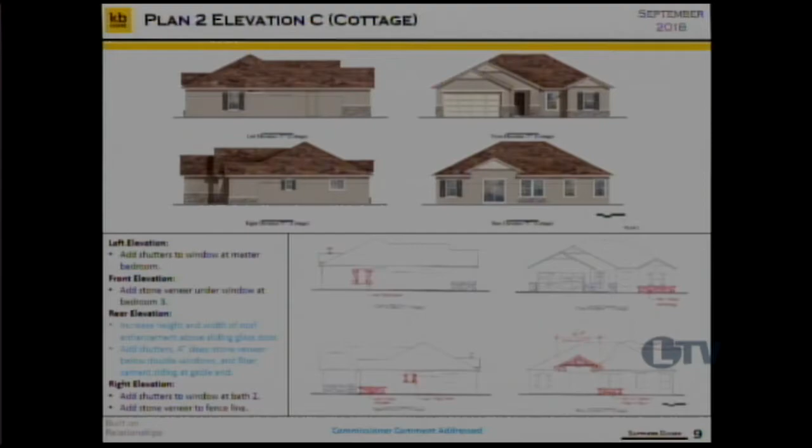Moving on to Plan 3, back to the Spanish. Shutters on both the left and right elevations have been added. On the front, we have again revised that stucco color of the covered porch. That is now matching the stucco highlight from the color board.

Similar to the first Spanish one that we saw, we have changed the color so that above the porch is that darker color versus the front. On the rear elevation, we have also had the roof enhancement above the triple windows - so again, not over the door, this is over the windows. And we've added shutters, the 4-inch stucco base below the window at the master bedroom, and we've also added clay pipes where the roof enhancement is.

Plan 3 for the cottage. Shutters have been added to both left and right elevations. We've added the stone veneer to the front of the front elevation, and we've also extended it to the right elevation to the fence line. At the rear, we have the roof enhancement, the shutters, the stone veneer beneath the windows, and the fiber cement siding at the gable end.

Plan 3 for the farmhouse. Shutters have been added to the left and right elevations. We have brick veneer at the front elevation that's been added, and it's also been wrapped around the right elevation to the fence line. We have added for the rear, shutters to the windows for the master bedroom. We have the roof enhancement and the brick veneer below the triple windows in this case, and the board and batten at the gable end.

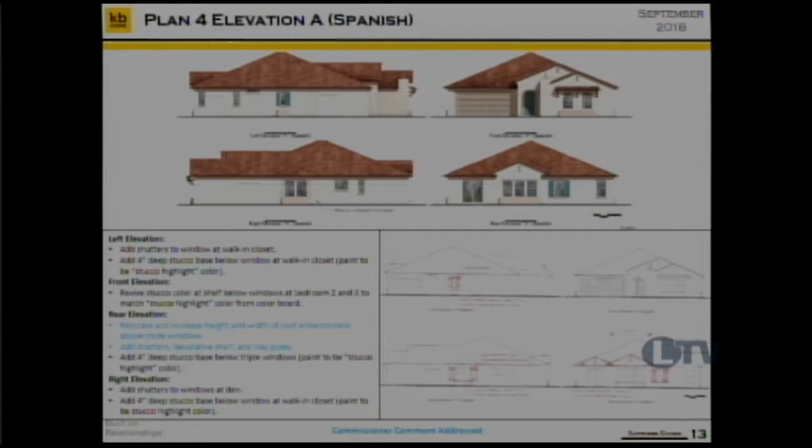Plan 4 for the Craftsman. At the left and right elevation, we have added shutters to the windows. We've added the stone veneer going to the fence line on both the left and right elevations, and we've increased the depth of board and batten material to 12 inches. The front elevation, the stone veneer has also been added below the bedroom and to the walls of both sides of the garage. At the rear, we have the roof enhancement, shutters, stone veneer below the double windows, and the board and batten at the gable end.

Plan 4 for the farmhouse. For the left and right elevations, we have added the outlooker and board and batten material to the gable end. We've also extended the brick veneer to the fence line. Also on the right elevation, we've added shutters to the windows at the den.

For the front elevation, we have the brick veneer that's now below bedroom 2 and at both sides of the garage, and we've replaced the brick at the bedroom to continue with board and batten. Going to the rear elevation, we have the roof enhancement, the brick veneer that's been added below the triple windows, and board and batten at the gable end. We've also added shutters to the window at the master bedroom.

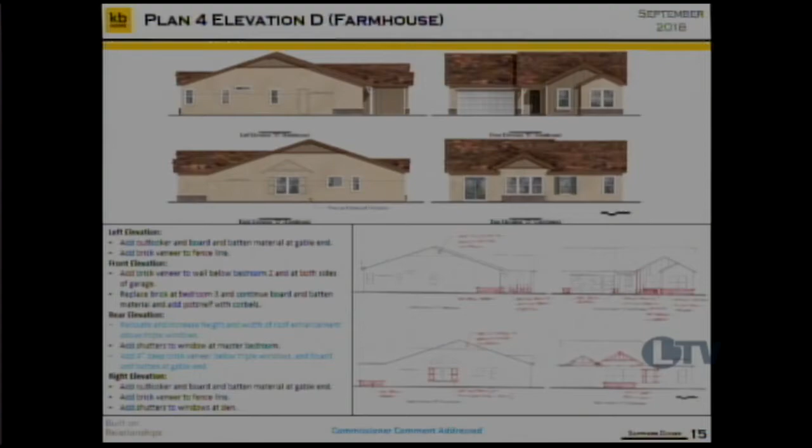Moving on to the final plan, Plan 5. With the Spanish, shutters have been added to the left elevation. The front elevation has that same stucco revision, a different stucco revision from the other Spanish, but there has been a revised stucco color.

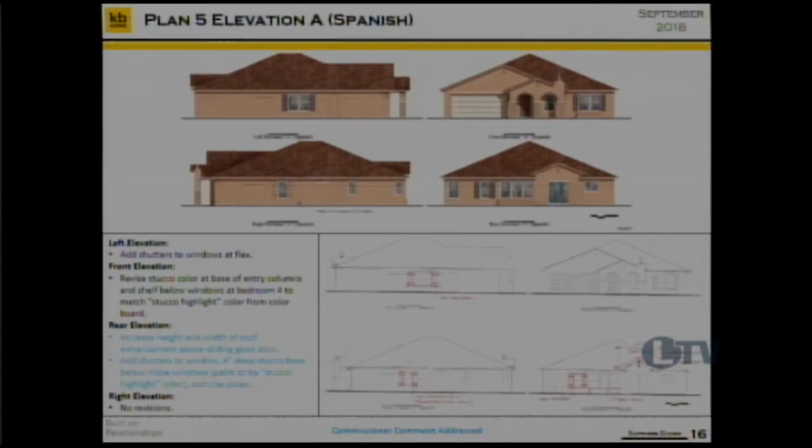These will be at the base of the entry columns and the shelf below the windows at the bedroom, matching the stucco highlight from the color board, or contrast. At the rear elevation, we have the roof enhancement, shutters to the windows, and the 4-inch deep stucco.

Base below the triple windows, and the clay pipes at the gable. Plan 5 for the Craftsman: there has been a roof element added over the left and right elevation, over the windows. One is the bedroom and one is for the flex space.

There's also been a stone veneer extended on the right elevation to the fence line, so it's now wrapped around both left and right elevations. On the front, we've added stone under the windows of the bedrooms, and we revised the porch columns to match plans 1 and 4, which was a comment we saw earlier for the Craftsman.

And at the rear, again we have the Commissioner comments: the roof enhancement, added shutters, the stone veneer below the double windows, and the board and batten at the gable end.

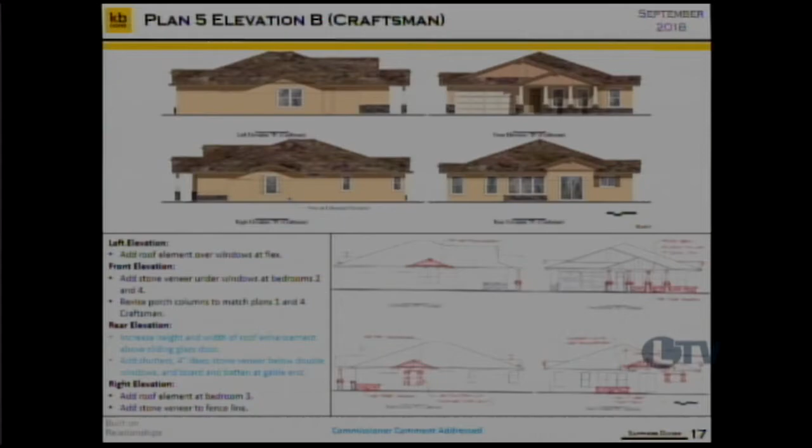And finally we have Plan 5, the cottage. On the left and right elevations we've added that roof element over the windows, and we've also extended the stone veneer to the fence line so both sides now have that extension. The front elevation has added a stone veneer below the bedroom windows.

The rear elevation includes the Commissioner comments about the roof enhancement, the added shutters, the added stone veneer below the windows, and in this case the fiber cement siding at the gable end. So with that, we feel we've taken the Commissioner's comments to heart and addressed them through the plans we've gone through. Thank you for your patience in going through that.

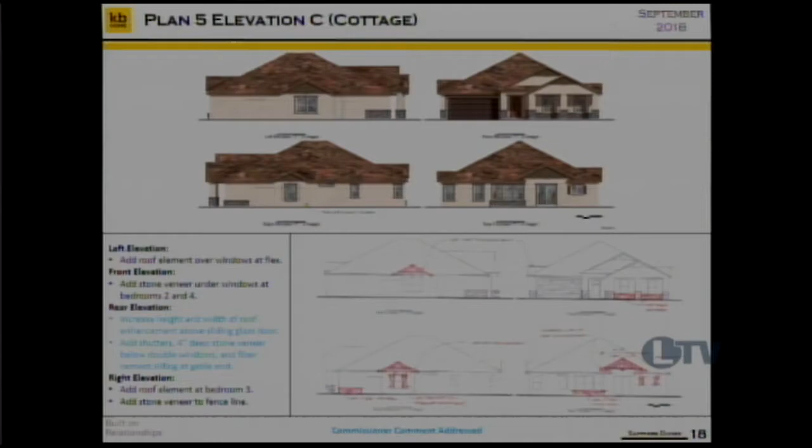Next, I just want to quickly go through again the overall elevation plans that we have. Looking at Spanish, that is offered on all 5 of our plans, and we do offer a variety of finishes when it comes to color and other features, so it's not just repeating the same Spanish elements over and over. They are unique across all 5 plans.

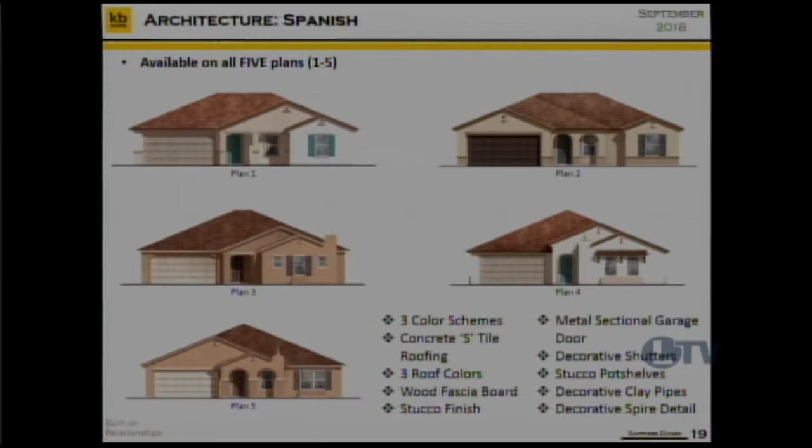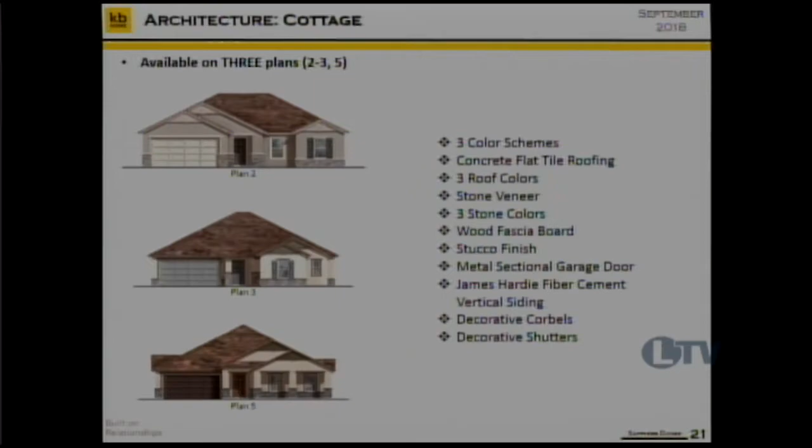Craftsman is being offered on 4. We have cottage being offered on 3 of the plans, and farmhouse being offered on 3 of the plans as well.

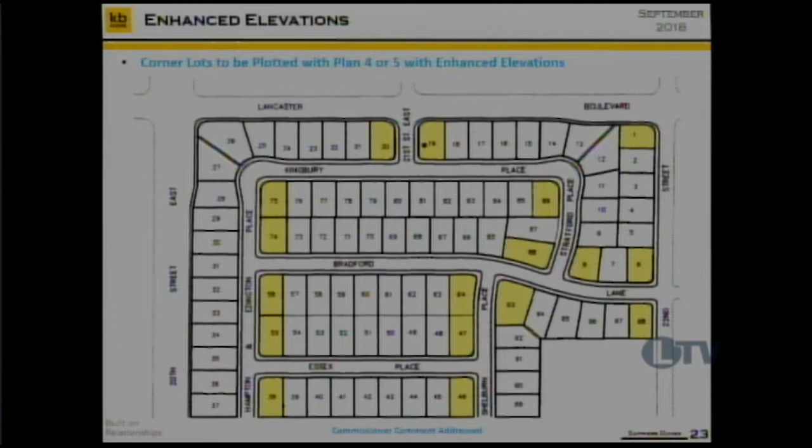Finally, the other comment we received from our last meeting was in regards to the enhanced elevations. We came away with needing to put the corner lots to be plotted with a Plan 4 or 5 that have enhanced elevations. On this site map, the yellow highlighted lots are where enhanced elevations will be available, again on Plans 4 and 5. I will go through what exactly that means.

So for an example, we have Plan 4, the Spanish elevation. Looking at the right elevation, where we have added additional shutters, as well as a 12-inch pop-out enhancement that is going to the other elevation shown here. It's visible from the front.

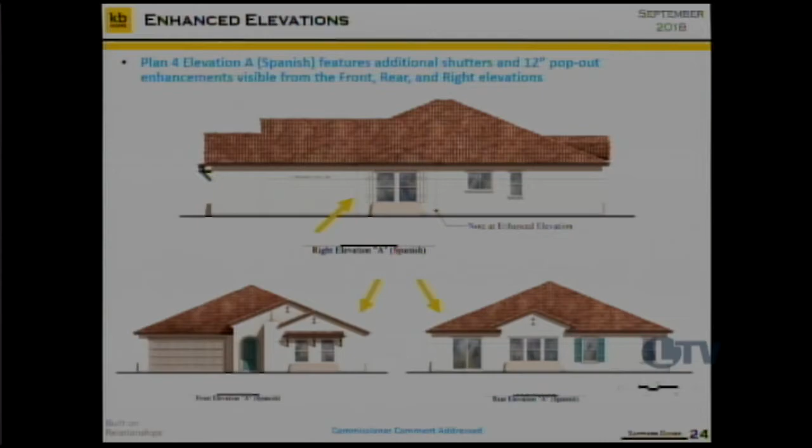So looking at the front elevation on the bottom left, it's a little hard to tell here, but on your copies it hopefully is more visible, that it is visible from the street. From the rear, which is on the bottom right, it is visible, and at the top it's visible if you're looking directly at the side elevation.

Similar programming has been offered on the other Plan 4 and 5 elevations. Just to give you an idea of what that might look like, we're showing the side elevations for the remaining 5 plans, so 6 in total, that will be offering those enhanced elevations.

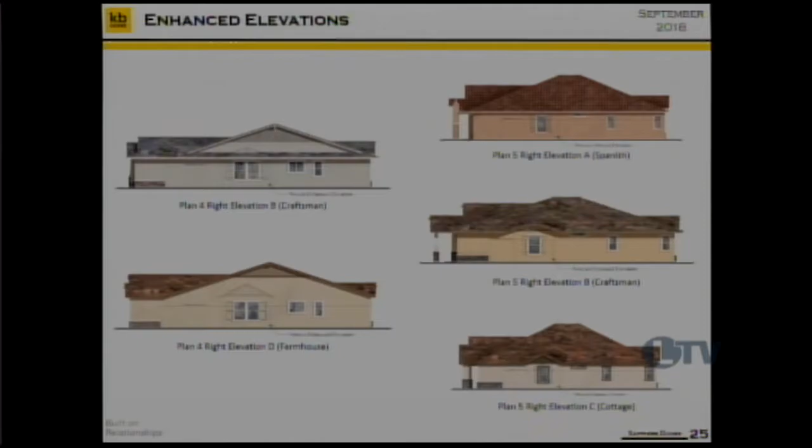So with that, we would like to open up for any questions you may have. We thank you for your time and for your feedback. We are very proud of the product we have come up with and hope that we have satisfied the needs of the commission. So thank you.

Well, thank you very much for your report. Do we have any speakers on this item? There is one speaker, David Paul.

Chair Carter and Commissioners, good afternoon. And first of all, congratulations. I didn't know what I was going to say today when I came here, but it looks like we've done a great thing. And I would also like to thank the applicant for making these changes.

I hope it doesn't change the price too much. But you guys should be commended because in all my years - a decade, 15 years - I've been coming to Planning Commission meetings, and I've never seen so much effort go into it. But now I see the results and I understand, so I applaud that. We need the housing. KB is a great ally to this city, and we just need to push forward with this because we need these homes.

It's about the total growth of our city and the long-term planning. But you did a great job making changes that, as I sit here, I realize are going to enhance the viability of these homes. As a first-time home buyer, sometimes you're just glad to see a roof over your head. But these homes are more beautiful now thanks to your effort and the applicant's, and I applaud you. Thank you very much. Thank you, Mr. Paul. Your words are appreciated.

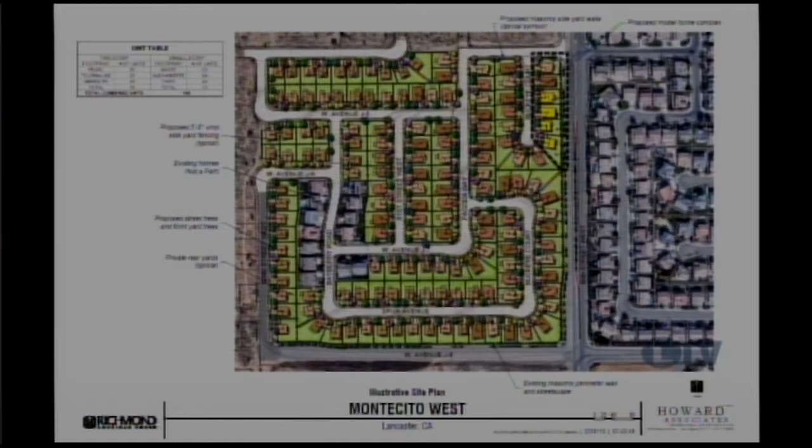They range in size from 35-foot wide to 40-foot wide. We plan on models running off of here, and we'll have a nice marketing corridor this way. That's pretty much it, the overview of the product.

We did, as Larissa said, go in for our first submittal. We received the comments, and we had a nice talk earlier in the week addressing the comments and what the expectations are. I think it was very beneficial for both sides, so I really do appreciate that. Our goal is to get some feedback from you guys as well. What we want to do is have a very nice, concise, complete package for next month where we could hopefully take an action and get this project moving.

So with that, I'm going to turn it over to Gary Clean with WHA, our architect. Thank you again for your time. We really do appreciate it. We look forward to working with you guys.

So this is your pointer, and there and back. Okay. Thank you.

Good evening. Gary Cunningham for the record - sorry how he pronounced it, but it's Cunningham. I'm an architect with William Hezmalhalch Architects down in Orange County, also known as WHA. We have designed projects for Richmond American Homes before in this city. It was constructed in 2011 during the recession, and we were very successful with the product and how it was received by the community.

So again, we are here today to present, as Tommy said, 3 one-stories and 3 two-stories. The last time we built, we only built all 2-story product, so the prior builder before us is presenting all 1-stories, so we may have an advantage over them since we have 2 stories. So with that being said, there's quite a bit of information.

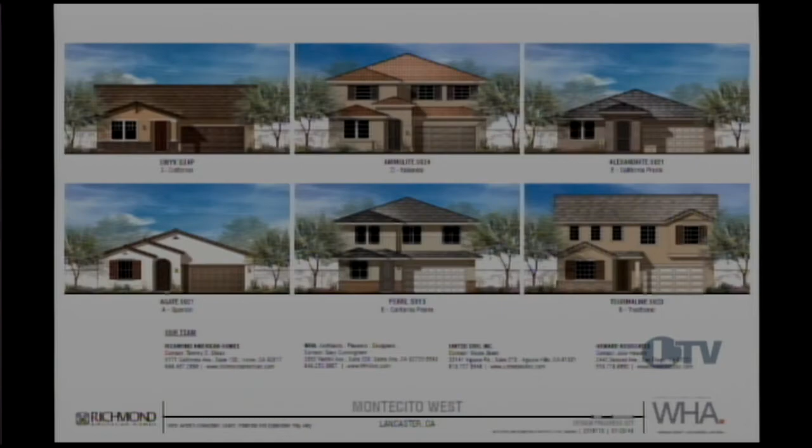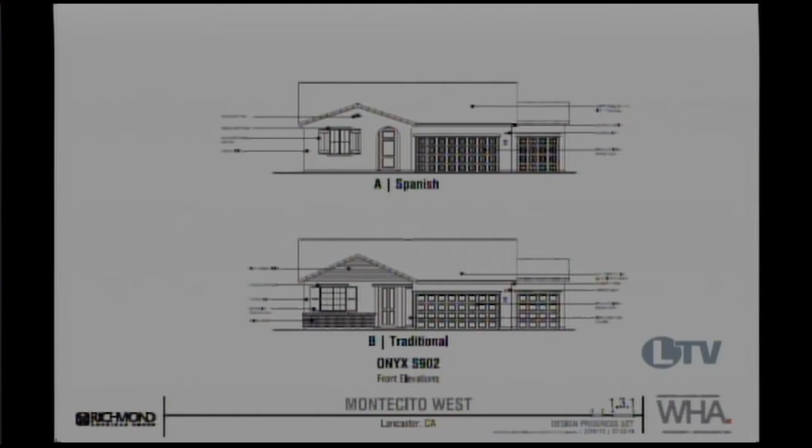So moving kind of quickly through, this particular page is found in your booklet. This is the material page that calls out the use of materials, be it a clay outlooker found in the gable end of the Spanish, horizontal siding found in the gable end, or brick or stone. Sorry for the reduction in scale, it's a little hard to read sometimes, but this will identify the materials we're using per particular style.

As we go through the elevations again. Gary? Yes, I'm sorry, over here. Oh, yeah, I just want to ask, are those the same pages that are in the big packet? Yes. Okay, maybe that'll help. The sheet numbers on the bottom right, just next to the WHA, this is 1.3.1. Okay, just wanted to make sure. Yeah, that will help guide you through.

So Plan 1, again, there's quite a few sheets, I think there's 250, so we'll just kind of do the highlight reel. The color schemes, if I'm not mistaken, they may be in the back of this. Can someone turn to the very back and tell me if there's color schemes inserted in there? I can't remember if they are.

Okay, typically on our next submittal, we'll include the color swatches, very similar to maybe something like this. Instead of physical boards, we'll actually include the swatches so you can kind of see. Sometimes councils request us to label the schemes, and it's not a problem to do, so that helps the council to associate the color in the back. We can do that if that's so desired.

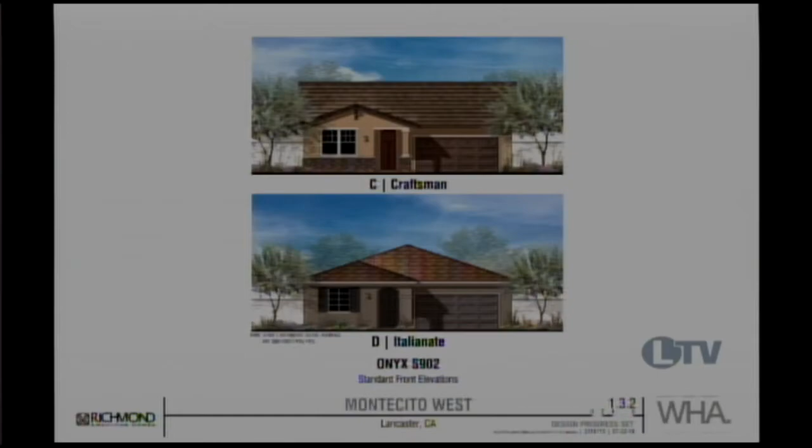There are different ways to interpret Spanish style, it can be Spanish Monterey, Spanish Eclectic, or Spanish Santa Barbara. There's many different ways to go with Spanish. Listening to the last group, we could offer some decorative tile around the entryway, since sometimes the foam is kind of boring. We can use decorative tile to enhance it, say, here at the arrival to the entry.

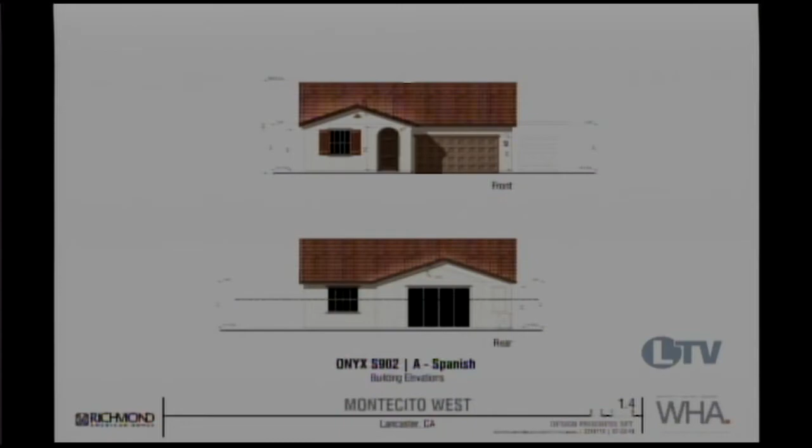The rear elevation has a nice feature, an offset gable, and later on it gives us an opportunity.

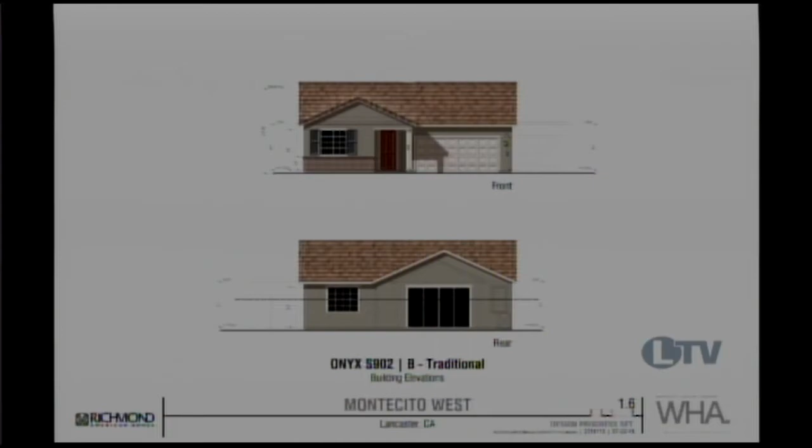Can I interject? I think it'll expedite the process, because we don't want to go back. Can you go back one slide? You weren't here for the previous month's discussion with Kaufman and Broad, and one of the things that came up was that according to the architectural design standards, we require 360-degree articulation. This would be an example of where you'd want to add additional elements as much as possible.

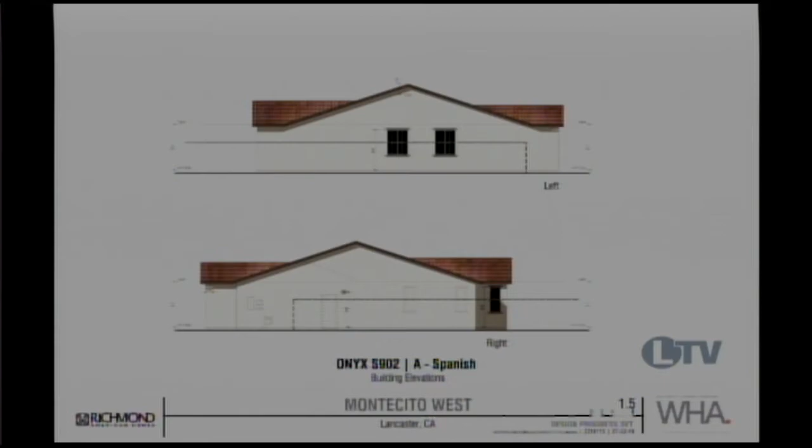Gable outlookers at the top, how's that one? That's better, but I understand exactly what you're looking for. There are other components to that, but that's what I wanted to say—360 articulation is a definite point, especially given the location of these houses.

This is everywhere in the city—we want every angle of it covered, even the back or the dead walls as much as possible, with creative elements like foam components, fiber boards, and stuff like that, depending on the style of architecture and material, whether it's Craftsman or Spanish style or whatever.

I collected that towards the end, looking at what was being approved. If you look back at our videos or meetings online, you'll see a previous presentation with a before and after picture, and how persistent we were about the 360 articulation with them. So we're trying to express that here.

Larissa communicated that as early as Tuesday, so I do hear that and we will follow up with it. I do see there's a note in these notes that mentions that too.

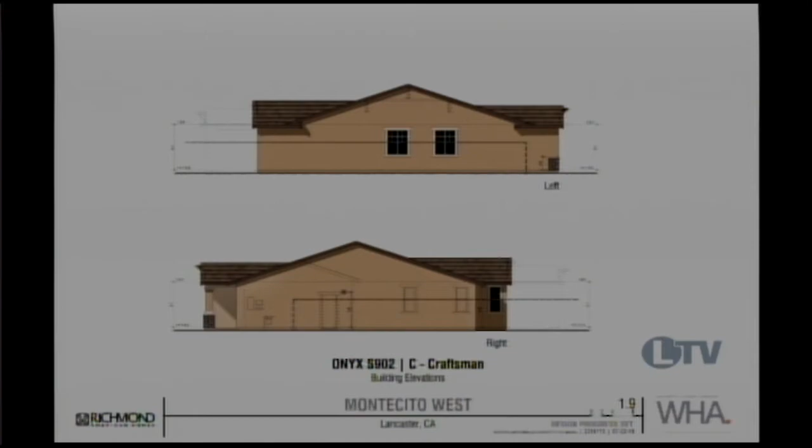So, moving along here, we also have a fence line matching theirs, trying to keep it similar so it's easier for council or commission to compare, having the same elements as the drawing. Matter of fact, the short story is the architect who was here—I actually hired him. I worked at KB.

Okay, moving right along, let's get into some other stuff. If you can go back a couple slides—start with that one, that'll work. When you put on the additional garage, it becomes more than 50% of the front of the house, clearly on all of these. That's an option, and I'm not even sure if that's going to comply, even if it's an option.

I believe my client's already looking into that. So for further discussion, we'll probably have to reconsider that. Thank you—those are the smaller product, this is a 40-foot wide product, and I understand we're complying currently at 50%, but once you tack on the 3-car, that changes the math.

Is that a 3-car? I thought it was only—I'm sorry, when you add the third bay, that gets you the third car, then the math doesn't work. Thank you. Possibly, if you pushed it back 12 feet, we would consider it.

I'm not saying that we wouldn't. Did you say 12 feet? Yeah, possibly, from the front. That's what I was thinking about too—if you had the third car garage set back far enough, now you're at 50% of the front fascia of the house still remaining with the 2-car, and then the third car garage is set back some.

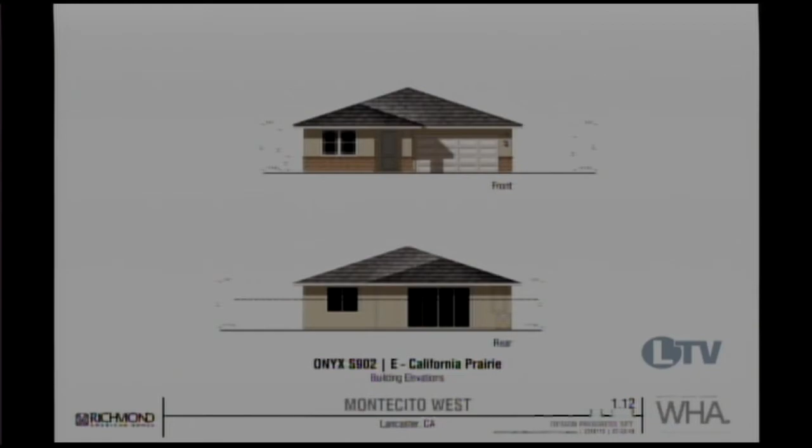Use of stone and brick on particular elevations - we try to accent the entry or the focal point and de-emphasize the garage. So by accenting the garage with stone on the right side in this particular case, or brick, we are adding stone to the elevation. Sometimes people feel that's a good enhancement, but it also brings that back into plane. So we want to enhance the focal point of the entry, the elements of the windows and shutters, and de-emphasize the garage. In some cases, you will find stone and brick on the garage wing, but not all the time, and that's, from the design side, that's why.

Get into a two-story here.

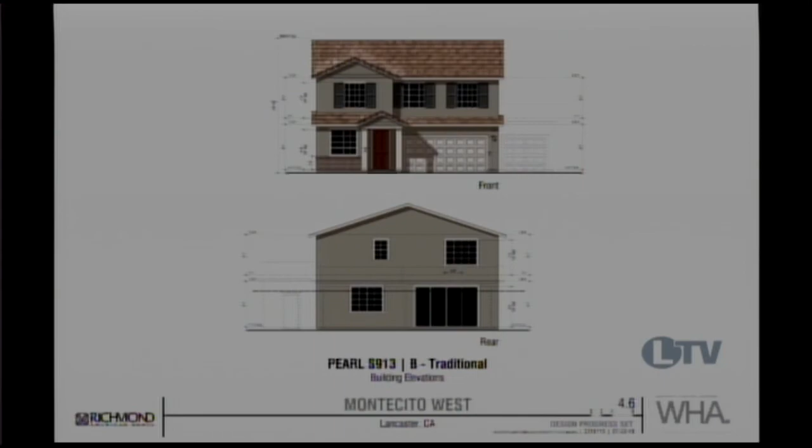So I'm probably one of the few architects who actually looks ahead of time, because I don't like to get everything approved and graded and then have plan check ask, 'what about this house?' and have to go back and chase it down to get it revised. So I'm upfront, in the earlier stages, collecting information and trying to be proactive to help the process—so, how to cool the house.

With today's technology, I'd be glad to send you a lot of information. What we're doing today is common practice—the building department can help explain to the commission what today's practice is. It's probably adding about $5,000 to a house, and each code cycle increases that. But it's literally amazing comparing 15 years ago, even 10 years ago, to today in terms of advances.

Houses with stucco or siding will collect heat as the sun goes down—the radiant heat is still there—but the insulation in the wall, there's a requirement called QII, Quality Insulation Installation, that helps push that heat away from the structure. It could also involve low-E windows, argon gas filled, vinyl windows instead of aluminum, and many other things.

Thank you. When you plot it out, you have to make sure your windows aren't facing each other on adjacent houses. So the key is 2 stories predominantly, because that's the exhibit I have to explain to civil - I have to tell them which plan to put on, because each window could be different per plan, and then elevation. So there will be an exhibit for that for staff to review, and that will be coming down the line.

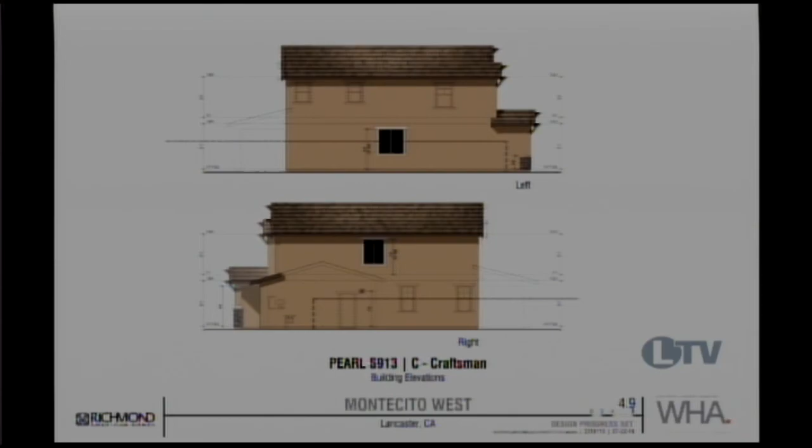And that could be something we can enhance on corner lots as an enhancement or a projection to help break up a flat wall - is that what we're looking for? Or articulation, for 360, right? Correct. Perfect, okay, good, we're on the same page.

Again, this is real quick - we just kind of came in here, but I think I'm hearing what you want, and you're clarifying it's even better. Glad we can help.

So there will be an exhibit, very similar to the last applicant, that we typically put on the cover sheet of our working drawings - lot number, enhancement, left or right - and then the builder and vendors would go to the drawings and say, add the outlooker, add the bay window, add those elements. They would be dashed, but not a buyer's option - as I try to tell my staff, it's not an option, it's an element that has to be put there. So those will be noted on our working drawings as well as the exhibits at enhanced lots. So other than that, I think basically the styles repeat.

Very good information I'm collecting from you, so I know what I need to do.